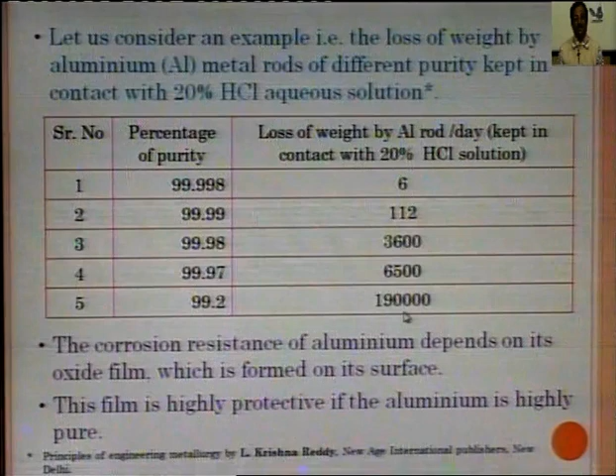So, therefore, it is possible to increase the corrosion resistance of a given metal by increasing its purity. Therefore, refining, the process of purification of crude metals, is an integral part of metallurgy. However, production of metals in their ultra pure form is not economical, and pure metal possesses inadequate mechanical properties such as softness, low strength, etc.

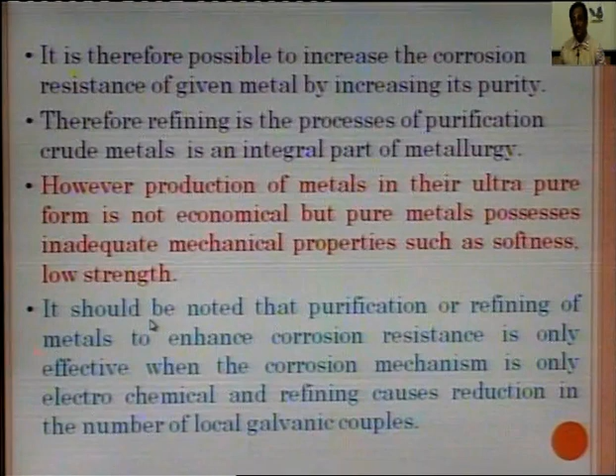It should be noted that purification or refining of metals to enhance the corrosion resistance is only effective when the corrosion mechanism is only electrochemical, and refining causes reduction in the number of local galvanic couples. It means, if the metal is undergoing an electrochemical corrosion mechanism, then only we can reduce its corrosion nature by the purification method.

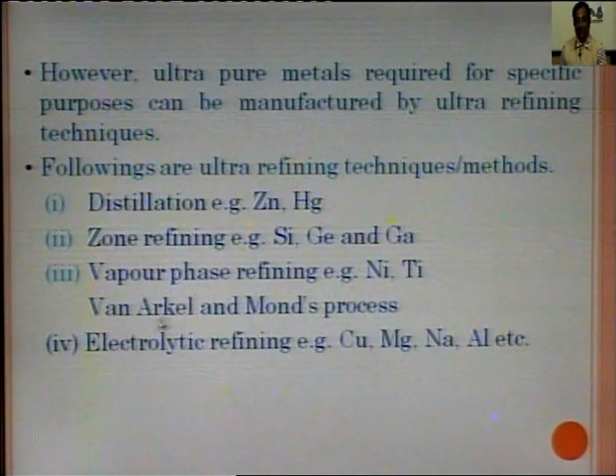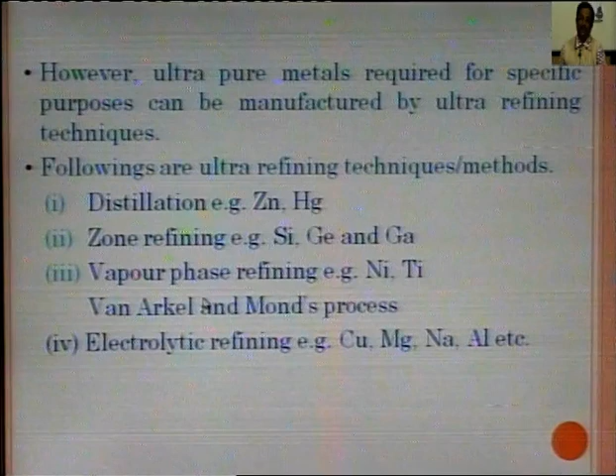But ultra pure metals are being produced for specific purposes and can be manufactured by refining. For example, zinc is purified by distillation. Zone refining is used to get silicon, germanium, gallium. Vapor phase refining, as you have studied in the first chapter, for nickel and titanium by the Van Arkel or Mond process, etc. Electrolytic refining is used to refine copper, magnesium, sodium, aluminum, etc. These are the techniques by which a pure metal can be obtained. Hence, we can reduce the corrosion.

Now, the last method of internal corrosion preventive measures is heat treatment. Heat treatment is another important internal corrosion preventive measure. What do you mean by heat treatment? Though there are different methods, the general definition of heat treatment we can write.

It is a process of heating a metal to a predetermined temperature and holding it at the same temperature for sufficient time to effect necessary changes in its grain structure, then cooling slowly at a predetermined rate. So it is heated to a predetermined temperature and cooled at a predetermined rate, because heating, maintaining at a particular temperature and cooling at a specific rate will bring changes in the properties, changes in the structure, and hence improve certain properties.

In other words, the properties seen after the heat treatment depend upon the temperature to which it is heated, the time for which it is exposed to that temperature, as well as the rate at which it is cooled. So, from that point of view, we have different types of heat treatment, classified as annealing, normalizing, quenching and tempering, austempering, martempering, case hardening and surface hardening, etc. From the point of view of your examination, only 4 of them are discussed: annealing, normalizing, hardening or quenching, and tempering. These are discussed in detail.

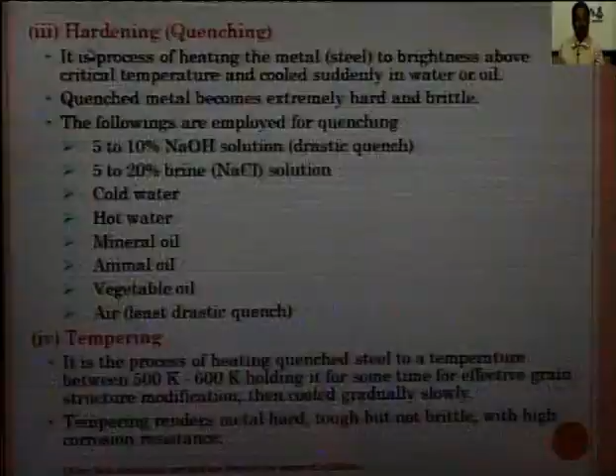Okay. Let us see what do you mean by quenching. Quenching is nothing but hardening. It is the process of heating metal to brightness above the critical temperature. If you have seen here, see, which is above its critical temperature, here is also above its critical temperature, and cool suddenly in water or oil.

See, in the previous case we have cooled it freely and gradually in air. So, these are differences which you are supposed to note. Critical temperature, so after heating, it is suddenly cooled by quenching it in water or oil. Quenched metal becomes extremely hard and brittle.

What are the media in which we can make quenching? 5 to 10% sodium hydroxide, this is considered to be a drastic quench medium. 5 to 20% brine solution, that is sodium chloride solution, is also an important quenching medium. Cold water, hot water, mineral oil and animal oil, vegetable oil, air, etc.

Tempering: it is the process of heating quenched steel. Look at that, it is after quenched steel. Okay. It is heated to 500 Kelvin to 600 Kelvin, holding it for some time for effective grain structure modification, then cooled gradually, slowly. Tempering renders metal hard, tough but not brittle.

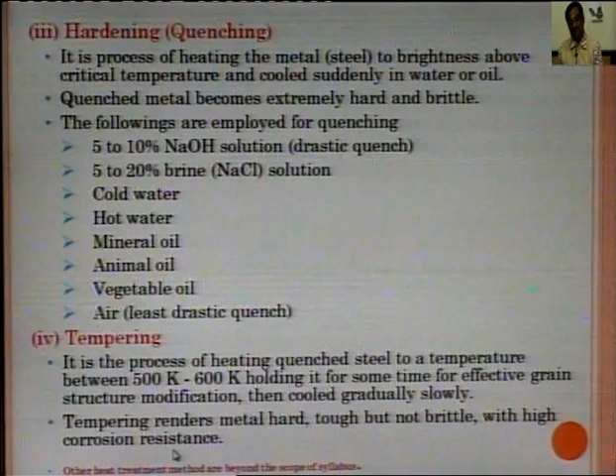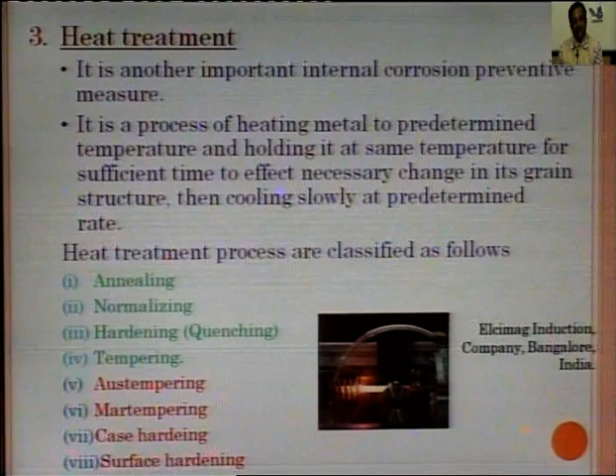Okay. Here it is hard and brittle, whereas in tempering it loses brittleness, with a high corrosion resistance which we are interested in. So, therefore, these are the treatments: annealing, normalizing, hardening or quenching, tempering. Apart from that, austempering, martempering, case hardening, surface hardening are other methods as well. However, these are beyond the scope of the syllabus. So, we restrict ourselves to only the 4.

Is that clear? So, now this is a small clip wherein you can see how this takes place. Okay, we can skip these videos.

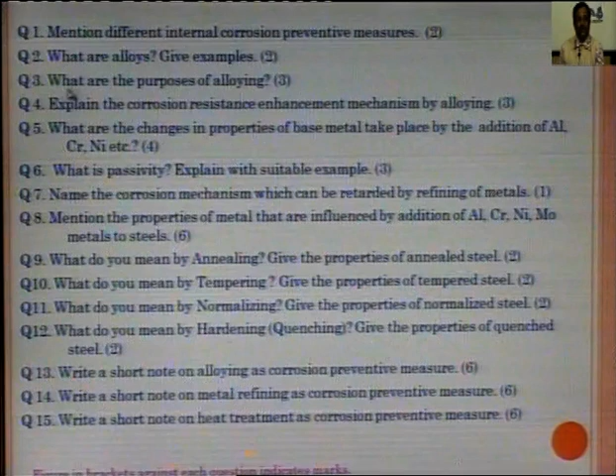And questions, let us come to know what type of questions we expect from this part of the syllabus. Okay. So, a question may be of this type: mention different internal corrosion preventive measures, maybe for 2 marks. What are alloys? Give examples, 2 marks. What is the purpose of alloying? Maybe 3 marks. Explain the corrosion resistance enhancement mechanism by alloying.

What are the changes in properties of base metal? Base metal means the metal which is to be protected from corrosion. Okay. So, base metal means the metal which is to be protected from corrosion. So, changes in base metal take place by addition of aluminum, chromium and nickel; that may be for 4 marks.

What is passivity? Passivity is a property of a metal which shows high corrosion resistance by itself, otherwise not expected from its position in the electrochemical series. So, for example, aluminum, nickel etc. are highly passive metals. Name the corrosion mechanism which can be retarded by refining of metals.

So, the corrosion mechanism that will help by refining methods as corrosion preventive measures is that the metal must undergo electrochemical corrosion. If the metal undergoes electrochemical corrosion, then only we can modify or improve its corrosion resistance capacity by the refining method. Okay.

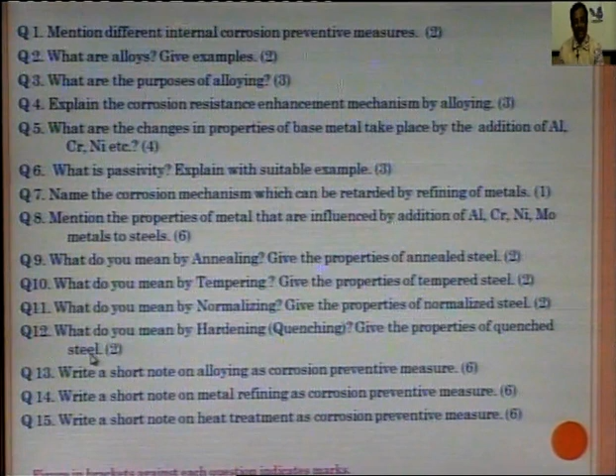What do you mean by normalizing? Give the properties of normalized steel. Like that, many more questions are expected. What do you mean by hardening or quenching? This is a usual question. Give the properties of quenched steel.

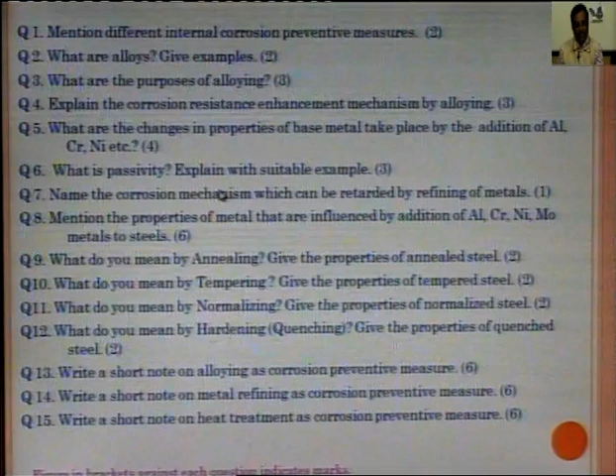Write a short note on alloying as a corrosion preventive measure. These are long answer questions. I am sorry, these are short. Write a short note on metal refining as a corrosion preventive measure. Write a short note on heat treatment as a corrosion preventive measure. These are some of the important questions one can expect from this part of the discussion, what we call internal corrosion preventive measures.

Okay. So, this will help you to understand this, and for more, I suggest you read Corrosion Engineering by M. G. Fontana, Tata McGraw-Hill, or Kuriacose Rajaram books, and my own book will also help you to prepare for the examination. Okay. This is what is all about internal corrosion preventive measures.